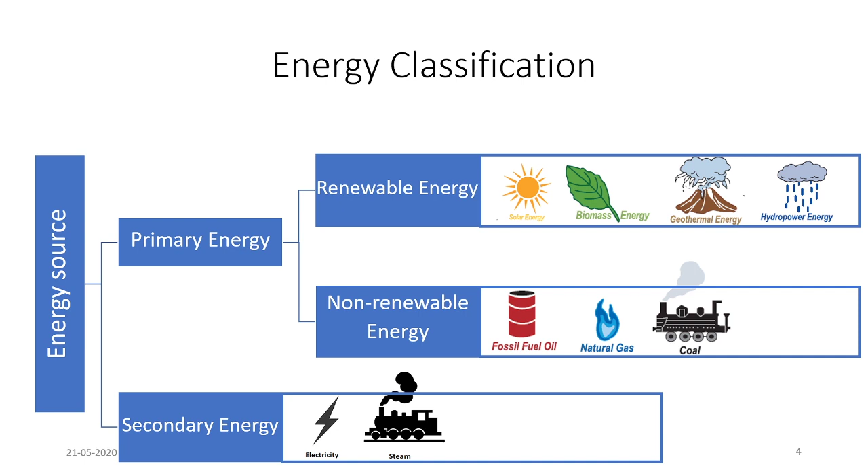Whereas on the other hand, non-renewable energy is the energy obtained from natural sources which cannot be replenished, or in other words, it cannot sustain against our consumption rate. Example: crude oil, natural gas, coal, etc. Primary energy can be used directly, or it can be converted into a more convenient energy form, that is steam or electricity, which is called secondary energy. Now there are two major classifications of energy, one of which we have just seen, that is renewable and non-renewable. Here we have classified energy based on available source.

The other way of classifying energy is conventional and non-conventional energy. Conventional energy is a well-developed source of energy and common over long years of usage. Non-conventional energy is a comparatively newer source of energy which is still under research and development stage. Let us classify energy sources in the given quadrant.

The first quadrant represents conventional and renewable energy sources, that is energy sources that are used over long years, well developed, and renewable, that can be replenished. In the second quadrant we'll see renewable and non-conventional energy sources, that is energy sources that can be replenished and are still under R&D. In the third quadrant we'll see non-conventional and non-renewable, and in the fourth quadrant we will see non-renewable and conventional energy sources. Now let us place each energy source in the quadrant.

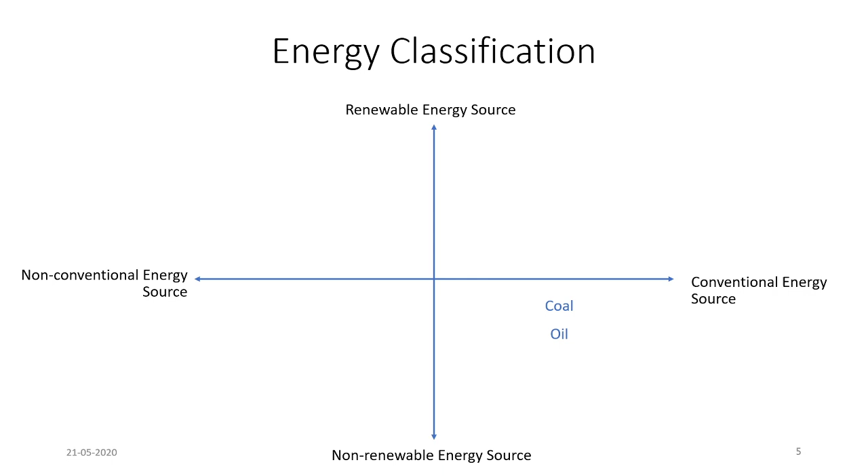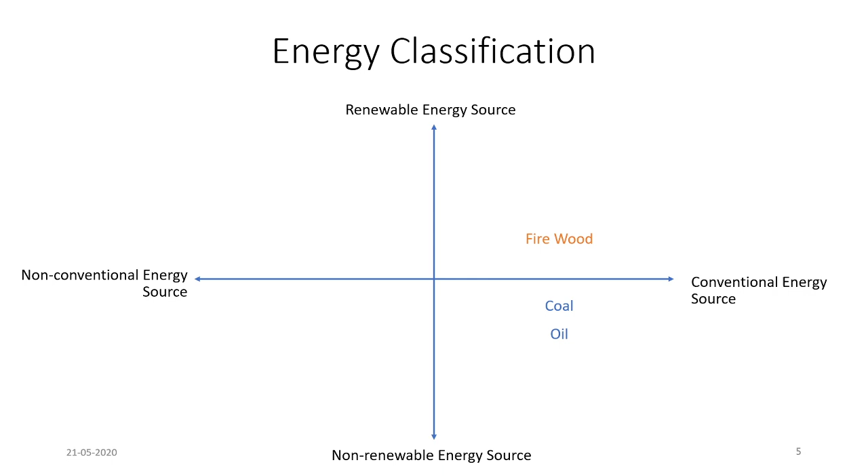Coal is a conventional source of energy. It is a well developed source of energy, but it cannot be replenished, so it is a non-renewable energy source. Same with crude oil: conventional but non-renewable. Next is firewood. Firewood is a conventional source of energy. We know we are using firewood for many years, but as long as forests are there, we'll consider it a renewable energy source. Cattle dung and vegetable waste will all fall under conventional but renewable energy sources.

Next is oil shale. Oil shale generally refers to any sedimentary rock that contains solid bituminous material that is released as petroleum-like liquid when the rock is heated in the chemical process of pyrolysis. So this is non-conventional, still under research, but a non-renewable energy source. Next is nuclear energy. Debate is still going on whether to consider nuclear energy renewable or non-renewable, but the amount of energy we get from a very small mass of radioactive material can allow us to consider it a renewable energy source.

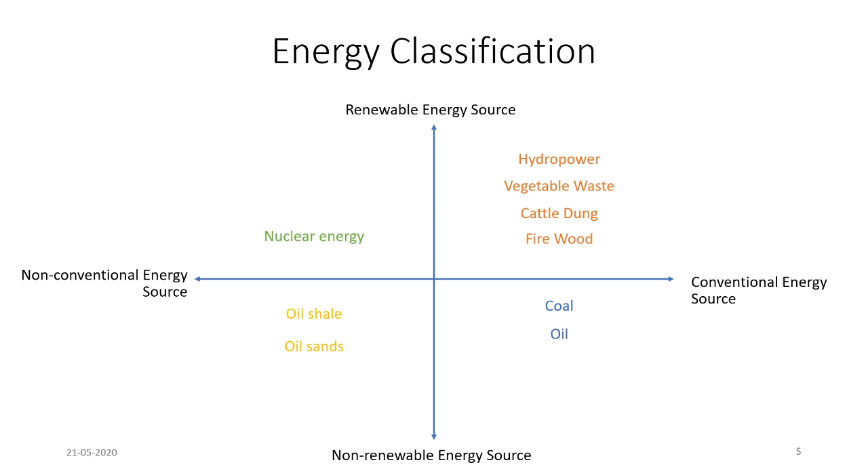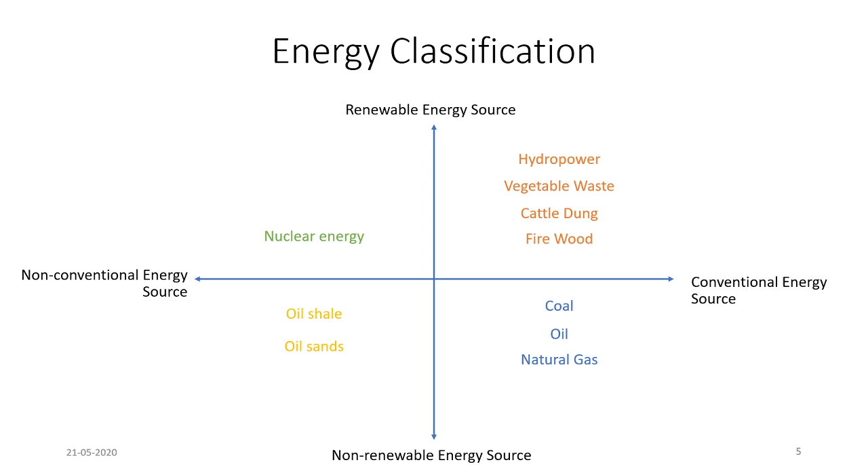Next is hydropower, again a renewable and conventional energy source. Oil sand is a combination of clay, sand, water and bitumen, a heavy black viscous oil from which refined oil can be extracted. And last is natural gas, which is again a non-renewable and conventional energy source. Once we know energy classification, now we can jump to the energy scenario.

First we will start with the international energy scenario, and the first resource we will consider is coal. Coal is the most abundant source of energy. It exists in the form of peat, lignite, bituminous, and anthracite. In the first table we can see countries with maximum coal reserves, whereas in the second table on the right hand side you can see countries with maximum coal production rate.

The largest coal resource is available in USA, that is almost 1/4 of total proven coal reserve, nearly 25%, followed by Russia, China, Australia and India. We will discuss this in more detail at national energy scenario. There is enough coal to last around 113 years at current R/P ratio, that is reserve to production ratio.

Now let us understand what is reserve to production ratio. We'll go with one example. If XYZ person has 100 rupees in his pocket and he is spending 10 rupees per day, then for how long will his 100 rupees last? So the answer is 100 rupees, that is reserve, divided by 10 rupees, that is extraction rate. 100 upon 10 will give you 10 days.

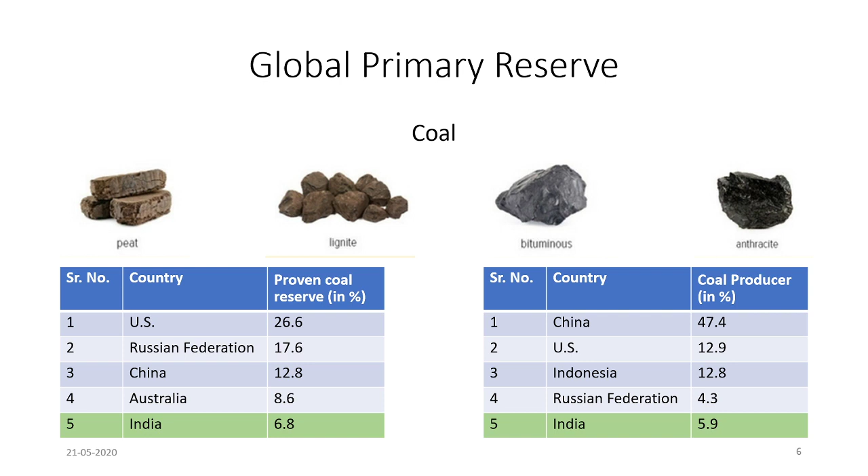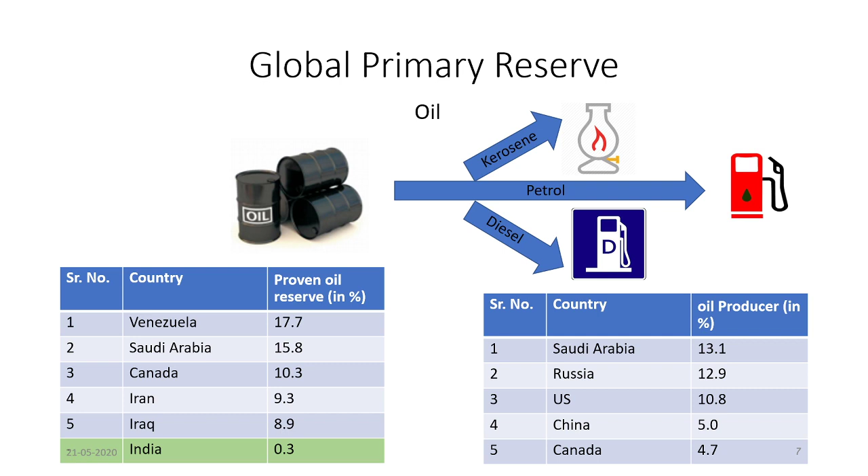Next is oil. Oil is a premier energy source with a wide range of applications. The global proven crude oil reserve was estimated to be 1,687.9 billion barrels. Almost 48% of proven oil reserves are in the Middle East. At the current rate of production and consumption of US, Russia and China, their oil fields will deplete within a decade. With the current rate of production and R/P ratio, oil is to last around just 47 years. Here we can see that Saudi Arabia is producing the maximum share of oil in the world, followed by Russia, US, China and Canada.

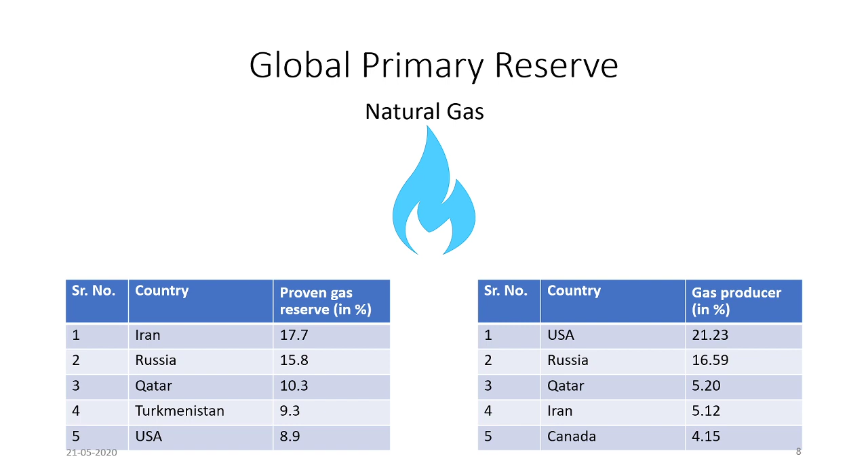Here we have talked about energy resources. Now let us see global energy consumption. Primary energy source is converted into secondary or tertiary energy. Final energy consumption is measured in million tons of oil equivalent, that is MTOE. The global energy consumption in 2014 was nearly 12,730.4 MTOE. In this, the share of oil was largest at 33%, followed by coal 30% and natural gas 24%.

It may be observed that India's absolute primary energy consumption is just 4.7%, because we are second rank for population and our absolute energy consumption is just 4.7%. That gives you the idea of the energy crisis in India. If we go sector wise, then industries are consuming 50%, followed by transportation 20%, residential 18% and commercial 12%.

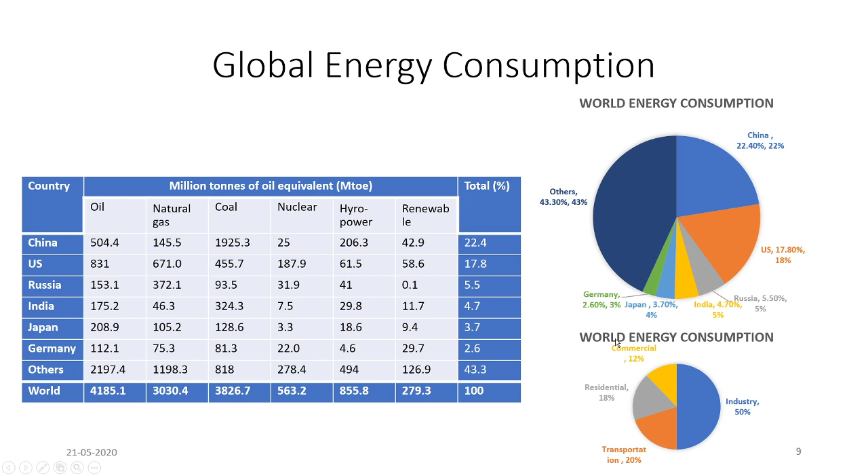Next we'll go for national energy scenario. We'll start with national energy reserve. First is coal. India has a huge coal reserve of about 60.6 billion tons, out of which 56.1 billion tons is anthracite and bituminous and 4.5 billion tons sub-bituminous and lignite. At the current reserve to production ratio, it may last for more than 100 years. The majority of coal, almost 80%, is mined with open cast mining or surface mining. The remaining 20% of coal is mined from underground mines.

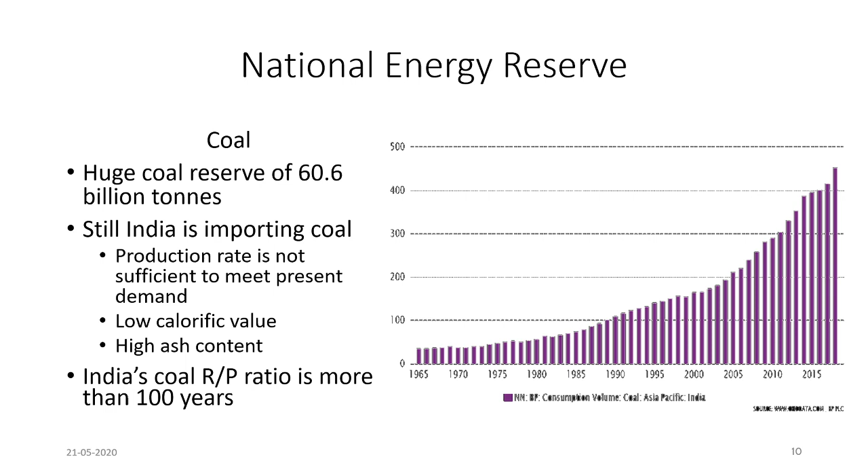India has a huge coal reserve, still we have to import coal from other countries due to the following reasons. The first reason is our coal production rate is not sufficient to meet our demand. Second is the coal available in our country is of low average calorific value with high ash content. Apart from this, one major issue to import coal is some political issues and some other issues as well. As discussed earlier, the current rate of production is not sufficient enough to meet the present demand of the country. Hence, we have to import coal from other countries like Australia, Indonesia, South Africa, which requires a sea route, and hence it is very much time consuming.

Next we'll go for oil. India's estimated oil reserve is 800 million tons. India's crude oil production was about 42 million metric tons against consumption of 175.2 million metric tons. So we are consuming 175.2 million tons against production of 42 million tons. That shows that almost 75% of crude oil we are importing. At current reserve to production ratio, oil in India can last around just 17.5 years.

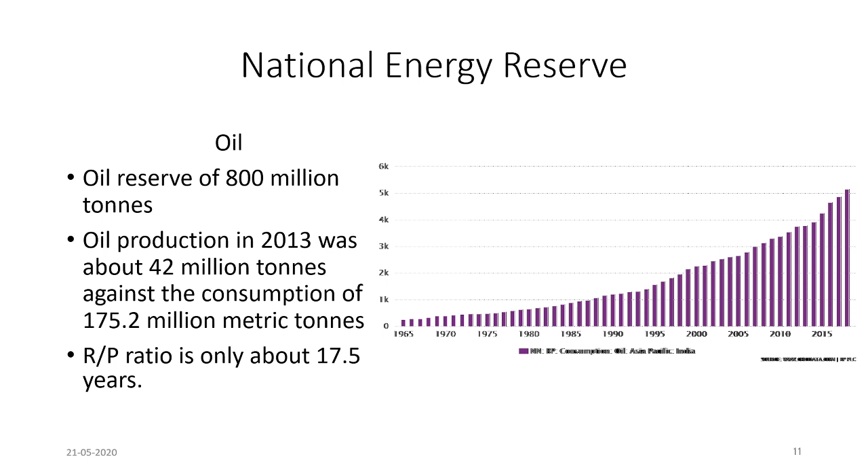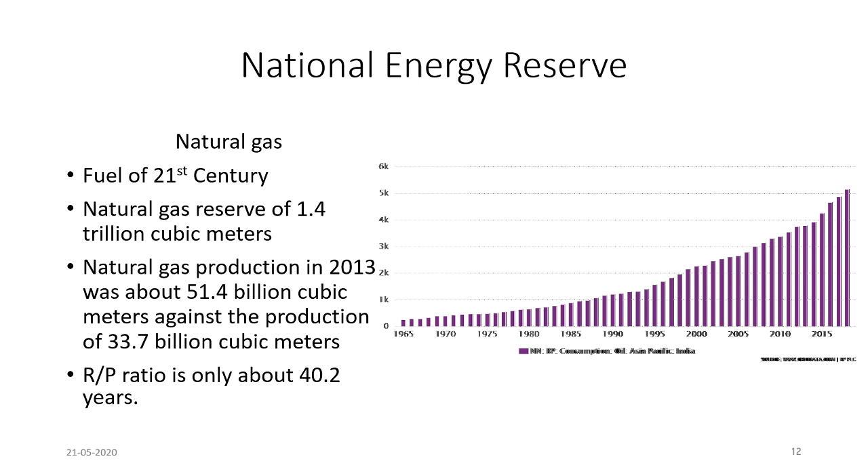Next is natural gas. Due to the less harmfulness to the environment, greater efficiency, and cost effectiveness, natural gas is considered a fuel of the 21st century. Apart from this, natural gas has the advantage of its high compressibility at lower temperature. India's gas reserve is estimated as 1.4 trillion cubic meters against the consumption of 51.4 billion cubic meters. We are producing 33.7 billion cubic meters; the remaining we are importing. India's gas reserves are estimated to last just for 40.2 years at the current reserve to production ratio.

So finally we are converting this primary source of energy into the secondary source of energy, and the most convenient source of energy is electrical energy supply. So what electrical energy supply is available in India? Out of that, you can see that 58.94% share is from coal, then 16.84% from hydropower, that is very big hydropower, then renewable energy 12.34, followed by gas, nuclear and oil.

If we find these renewable energy sources and distribute this 12.34 among large hydro, small hydro, solar and wind, then you will find that large hydro is almost 53%. Now large hydro has some disadvantages, and because of that we can reduce large hydro by increasing the shares of wind and solar. Wind is a more unpredictable source of energy than solar. Then we can focus on solar, and improvement can be done to increase efficiency of solar thermal or photovoltaics, so that the share of solar can increase from 17 to some large value, and ultimately that results in an increase in the renewable energy source share as well.

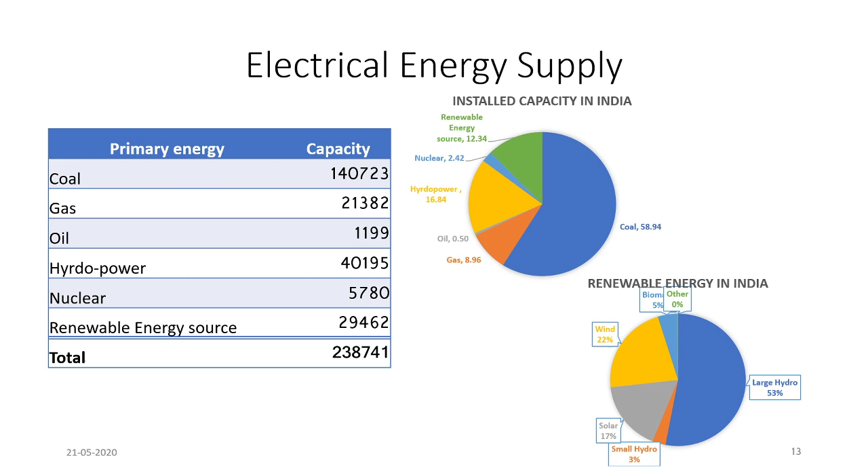This is energy consumption in India. Industry is consuming 44%, followed by transport 17%, residential 14%, and then finally agriculture just 7%.

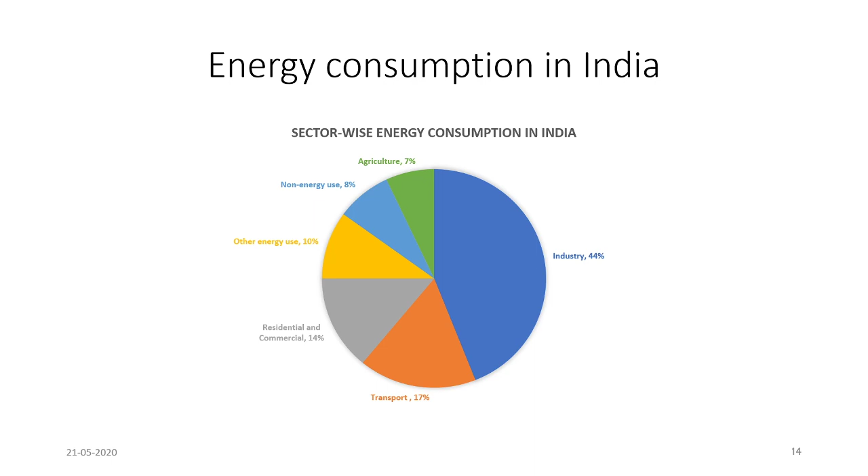So let's see what is energy management. Energy management is the strategy of adjusting and optimizing energy using systems and procedures so as to reduce energy requirements per unit of output while holding constant or reducing total cost of producing the output from these systems. So here we can see energy management is a strategic approach where we can adjust and optimize energy supply with the aim to reduce energy input, thereby reducing cost of energy. Energy management can also be broadly defined as a proactive, organized and systematic management of energy used in a building or organization to satisfy both environmental and economic requirements.

The objectives of energy management: first is to achieve and maintain optimum energy consumption and utilization throughout the organization. When we go for optimum energy consumption, definitely there will be maximum utilization of energy throughout the plant or organization. Second, to minimize energy cost without affecting production and quality. By minimizing energy consumption, cost of energy can also be reduced. And third, to minimize the environmental effect. This we can achieve in two different ways: first is utilization of renewable energy, and second, utilization of energy with maximum possible efficiency, which reduces environmental effect.

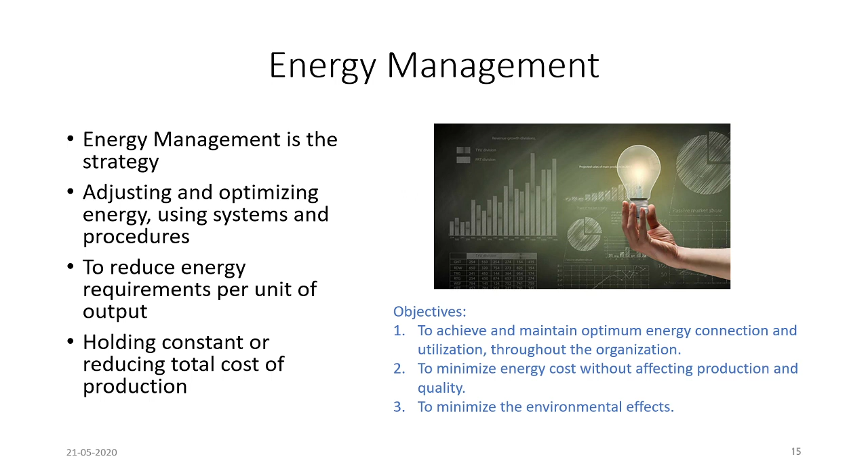Next, we will go for energy audit. As per the Indian Energy Conservation Act 2001, energy audit means the verification, monitoring, and analysis of use of energy, including submission of a technical report containing recommendations for improving energy efficiency with cost benefit analysis and an action plan to reduce energy consumption. In energy audit, we must first monitor, verify, and then analyze consumption of energy. Moreover, we have to find energy saving opportunities and give recommendations to improve energy efficiency along with cost benefit analysis. Finally, all these things are put on paper and a report is made which is to be submitted to the organization.

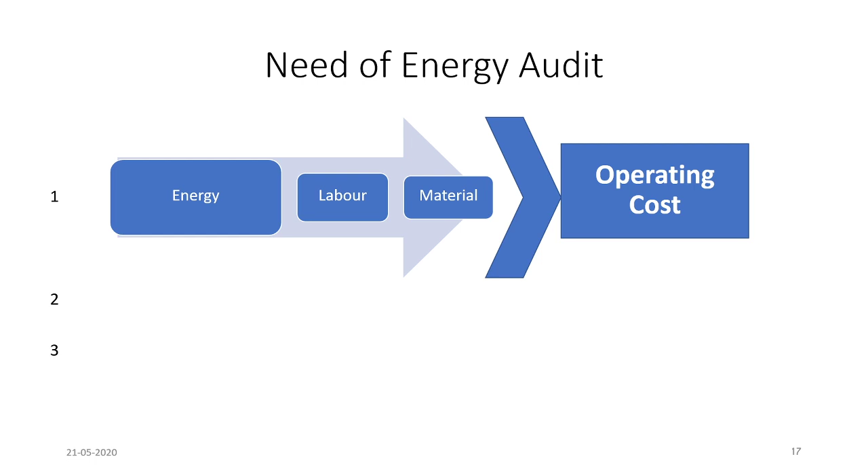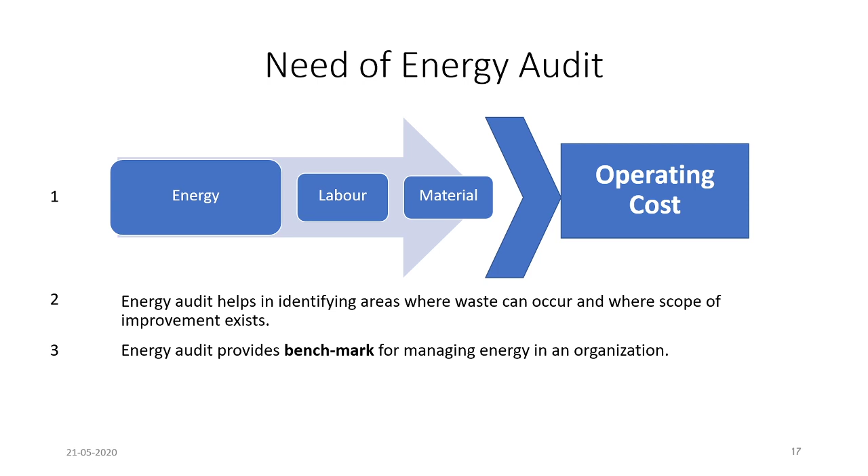Why do we need energy audit? In any industry, major operating costs are energy, labor, and material, out of which energy has the highest potential for cost optimization. In industry, we carry out many processes which require energy, and it may be equipped with various facilities which again require energy. So energy audit helps in understanding consumption of energy in various facilities and processes carried out in an industry so that one can identify the scope of improvement in terms of energy savings. Energy audit provides a benchmark for managing energy in an organization.

So basically, energy audit is a translation of conservation ideas into realities by providing technically feasible solutions with economic consideration. It helps to find out power consumption according to different areas and at various times. Types of energy audit: energy audit can be classified as detailed audit, preliminary audit, and targeted audit.

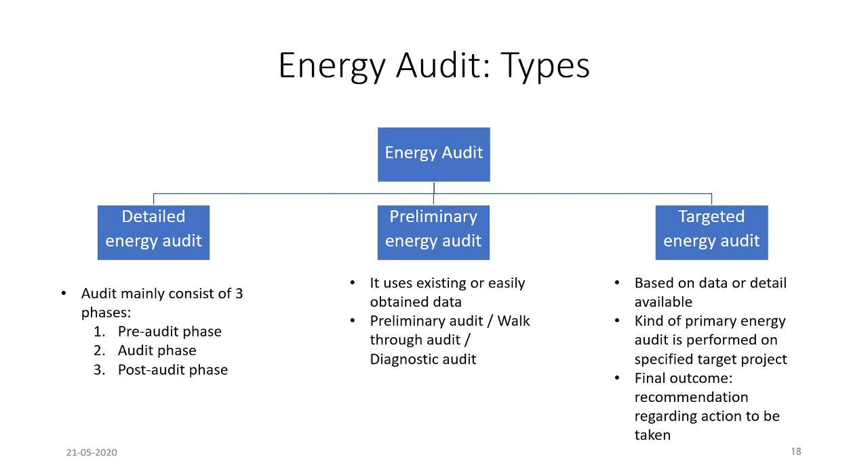Let us start with preliminary energy audit. Preliminary energy audit is a quick exercise. It is also known as walkthrough audit or diagnostic audit. It actually uses existing or easily available data. Preliminary energy audit can be completed in 2 to 3 or sometimes 4 days. Here, the energy auditor relies on his experience, visual information, and quick diagnosis.

In preliminary energy audit, the following steps are carried out. Step number 1 is to obtain primary data. This can include obtaining the electricity bill of minimum last 1 year. Then obtain production or plant related data. It includes data like for how many hours per day a particular machine is operated.

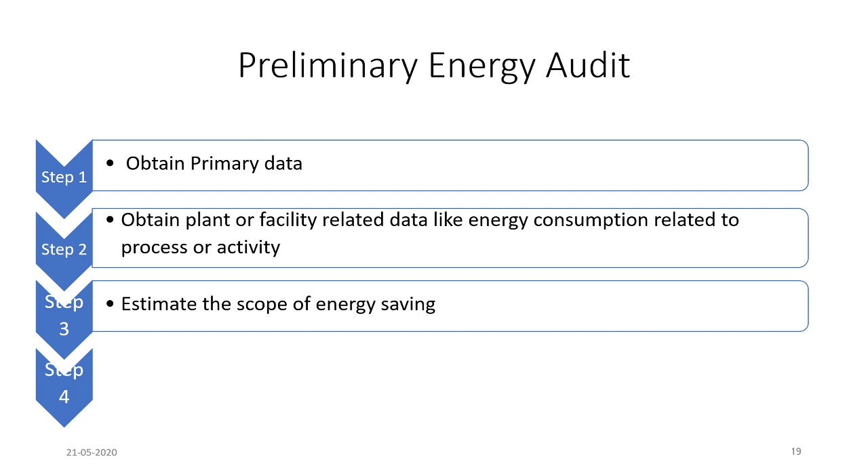Third is estimate the scope of energy saving. From this available data, the energy auditor has to estimate the scope of energy saving. From the various scopes, he has to identify the most likely and easier energy conservation opportunities. For example, unnecessary lighting, leakage, temperature setting, etc.

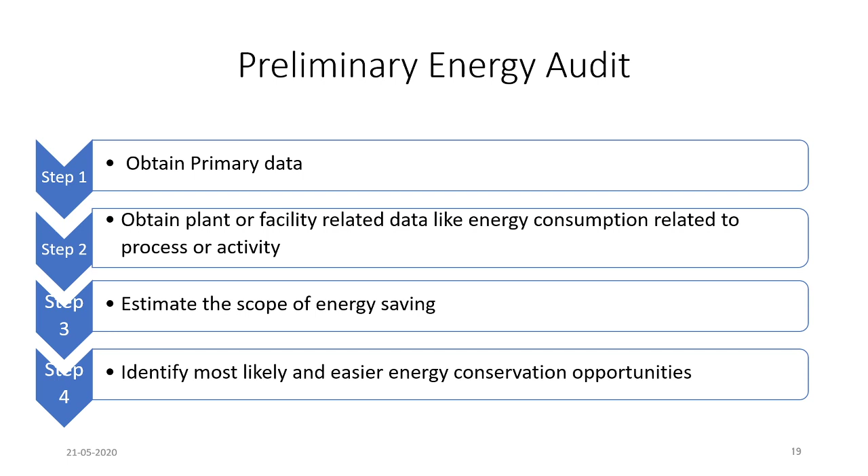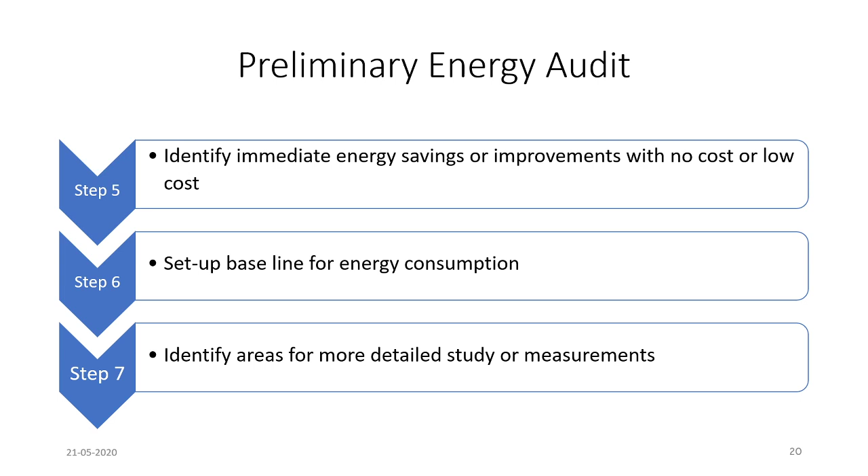Step number 5 is to identify immediate energy saving improvements with no cost or low cost, that is, prioritize various energy saving ideas. In step number 6, set up a baseline for energy consumption and then identify areas for more detailed study or measurement.

Let us see various leakages. So first, heat can enter through roof and wall. This loss can be reduced by providing cavity wall and wall insulation. Next can be glass walls. If heat is entering through the glass wall, which is a transparent medium for incoming radiation, it produces a greenhouse effect. Solar film can be provided to reduce these losses. And the next is floor loss. By providing proper insulation, we can reduce floor loss.

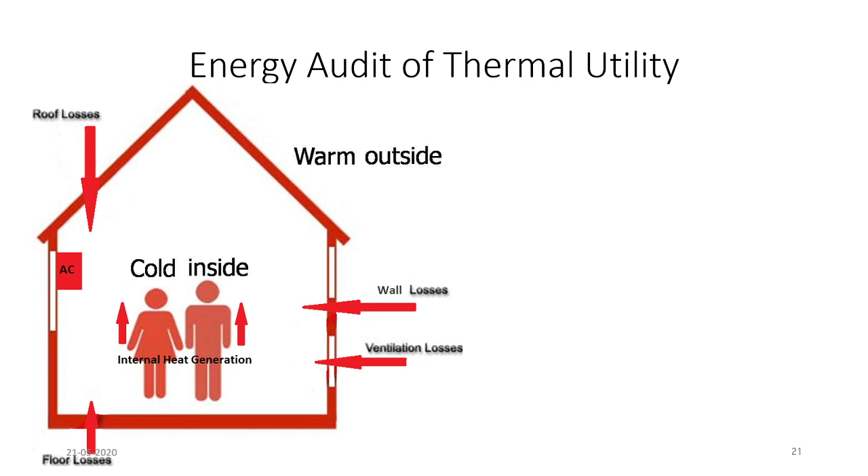This is one way. Now suppose the organization is going for a new air conditioning system, then it will have two options available: a 3-star air conditioning system with lower initial cost but higher operating cost, and a 5-star air conditioning system with higher initial cost but lower operating cost. As per BEE guidelines, if EER, that is energy efficiency ratio, lies in the range of 2.9 to 3.09, then that AC is labeled as a 3-star AC. If it is 3.3 or higher, then it is labeled as a 5-star AC.

Now EER, that is energy efficiency ratio, gives you insight into cooling capacity per unit power consumption. For calculation, I have considered the minimum EER for the given range, so for 3-star 2.9 and for 5-star 3.3. Some data is assumed here, that is a 1.5 ton AC that I have converted into watts. With the formula of EER, input watts are calculated, and then by assuming some hours per day for which the air conditioning system is running and dividing by 1000 to convert into kilowatt hours per day, we get the units of energy consumed per day. Then multiplying that number by 30 gives the value for 1 month, and multiplying it by the cost you pay per unit will give you the cost for the 3-star AC and 5-star AC.

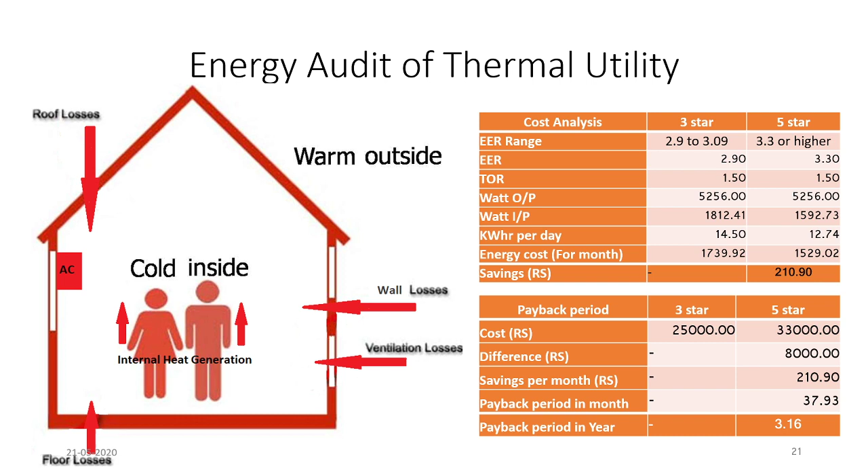This 8,000 rupees which I have paid extra initially is giving me a saving of 210.9 rupees per month. If I divide these two terms, then I'll get the payback period in months, that is 37.93 months, which if I convert into years, is almost 3 years. So the extra 8,000 I have paid, I'll get back in nearly 3 years, and after that I'll start making profit from that investment.

Next, I'll go for detailed energy audit. As the name suggests, it is a comprehensive audit which is detailed energy project implementation plan for an activity. It includes detailed energy cost saving calculation. Key principle for detailed energy audit is energy balance. Detailed energy audit is carried out in three phases: pre-audit phase, audit phase, and post-audit phase. It actually requires around 1 month to complete detailed energy audit.

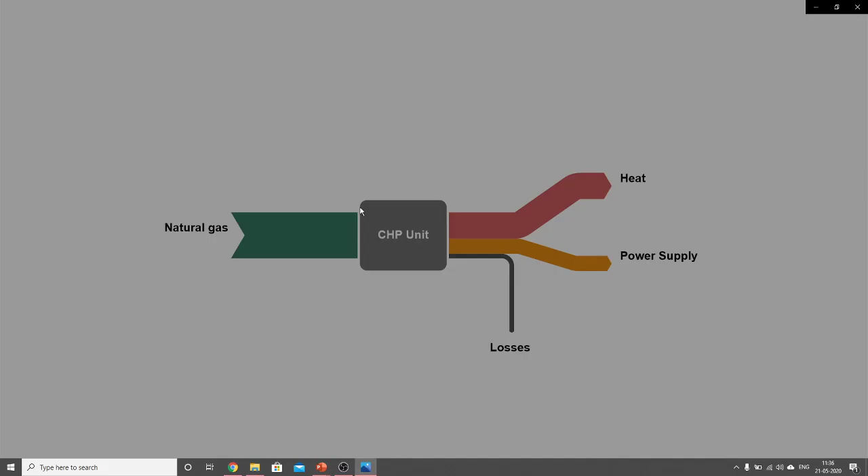In next step, energy utility diagram or energy flow diagram or process flow diagram can be drawn. Under this step, plant service utility diagram can be prepared. Here you can see a typical example of energy flow diagram. It is used to show energy flow and energy transformation graphically and quantity wise. Here we can see that input to the combined heat and power unit is natural gas, which is then converted into heat and power at the cost of some losses. Here thickness of each flow gives you the amount of energy associated with it.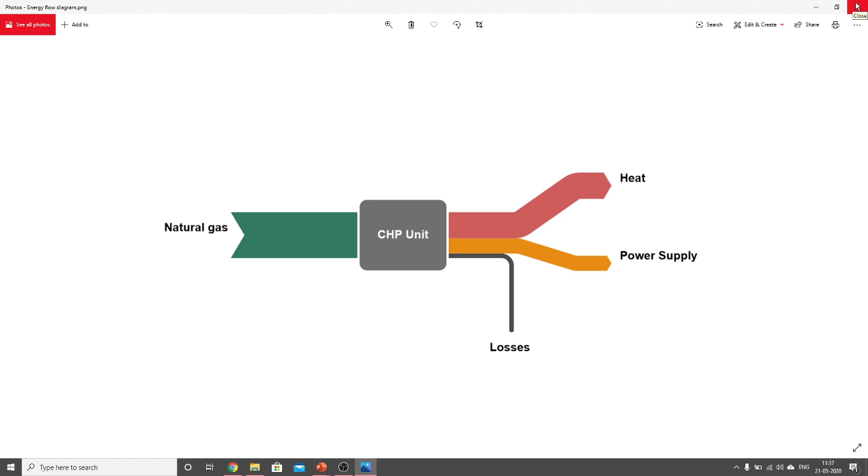This step also includes preparation of process flow chart for energy audit activity. So it gives idea about transformation of energy, material, etc. in the plant. Step number 4 is to conduct survey and monitor. It mainly includes measurement. In this step, with the help of portable measuring instruments, measurement is done, data is taken, and operating data can be obtained.

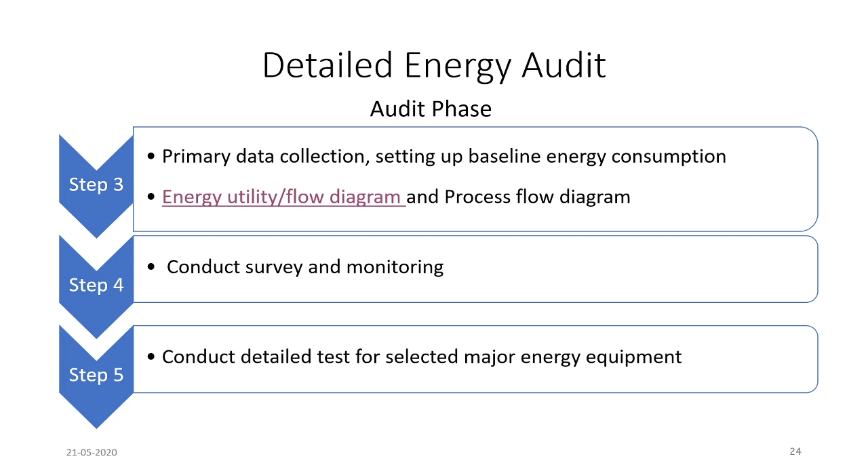Once we get data, next step is to go for detailed test for selected major energy equipments. Under this step, energy guzzling devices like boiler, pump, compressor, furnace, etc. are monitored for 24 hours. Once we get data, we have to analyze it. So analysis of energy use. In this step, by applying energy balance and mass balance, energy loss or waste analysis can be done.

Next step is identification and development of energy conservation opportunity. In this step, ideas are developed for energy saving opportunity. Ideas are reviewed and a lot of brainstorming is done to finalize efficient technology or component needed for that energy conservation opportunity. Sometimes even contact can be made to vendor for new and efficient technology for its pricing and costing. Once we get cost, we can go for a cost benefit analysis. In cost benefit analysis, technical feasibility and economic viability is checked for each energy conservation opportunity, and based on that various options are prioritized.

The most promising project from this can be selected, and let's see based on what we can select the most promising project. It is based on two parameters, economic feasibility and technical feasibility. A project is considered a good project if its economic feasibility is well defined and attractive as well, and if the technology is already available in the market, it's existing technology, then it's easy to adopt it, and its technical feasibility is also good. Such types of projects are considered good. So based on these guidelines, we can select the project which is most promising.

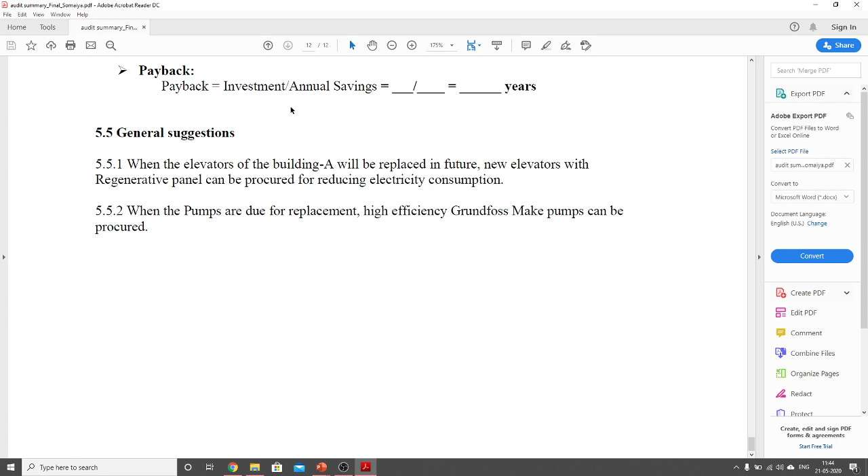At the end we have to give general suggestions for the future. Here one suggestion is given that current elevators can be replaced by regenerative panels so that energy consumption will be lesser, and when pumps are due for replacement one can go for high efficiency pumps. Well, this is the energy audit report of a small commercial building, hence it is small, but it can be very big when you are doing an energy audit report for a power plant or a big commercial building; then definitely its size will be comparatively larger.

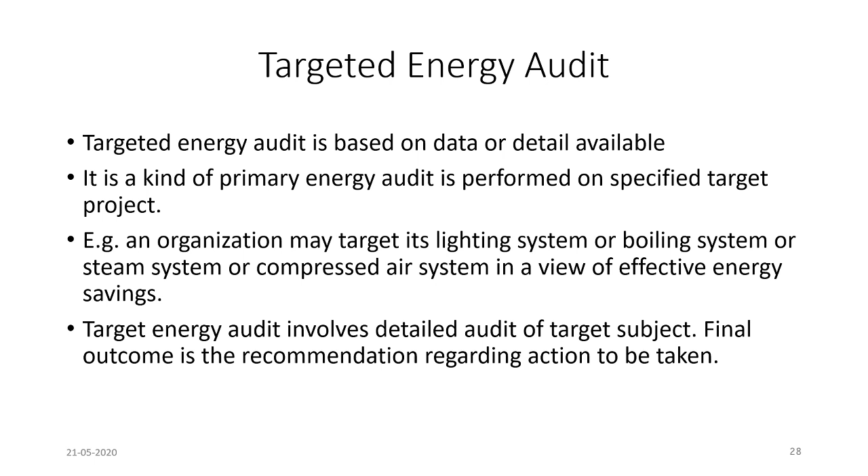Next, and at last, is targeted energy audit. Targeted energy audit is an energy audit conducted based on data or details available. A kind of primary energy audit is performed on a specific target project. For example, an organization may target its lighting system, boiler system, steam system or compressed air system with a view to effective energy saving. Targeted energy audit involves audit of the targeted subject only. The final outcome is the recommendation regarding action to be taken. So that is the third and last, targeted energy audit. Now we'll go to the advantages of energy audit.

Energy audit helps in reducing energy cost in the facility or plant for the same production. Reduction in energy cost helps in reducing production cost in a plant or facility. Reduction in production cost improves competitiveness of product in market. Reduction in energy cost results in lower electricity bills.

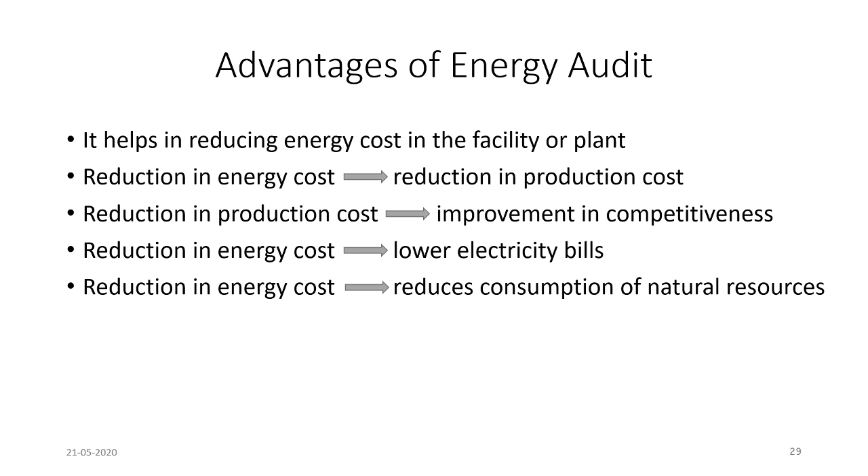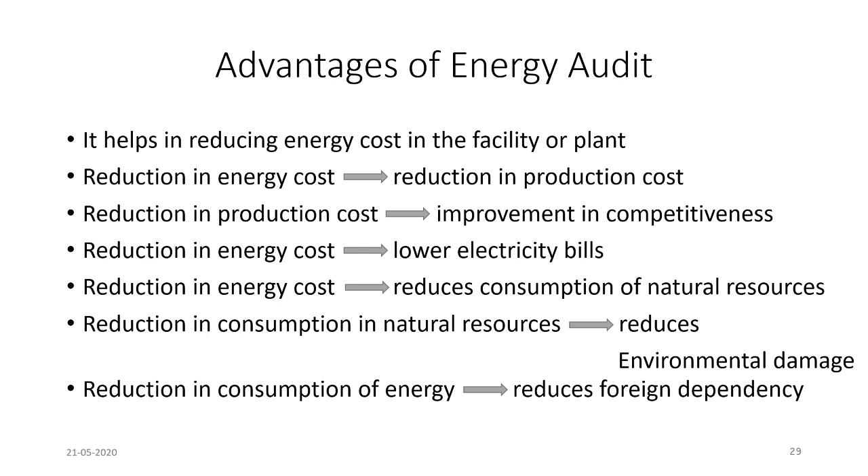Reduction in energy cost reduces consumption of natural resources. Reduction in consumption of natural resources, again, helps in reducing damage to the environment. And finally, reduction in consumption of energy reduces dependency on other nations for natural resources.

Let us understand importance of energy audit. Energy audit, even though it seems to be a very complex activity, is actually a very simple method that uses the basic principles of energy conservation and mass conservation. With a simple fundamental principle, one can have huge impact on performance of any plant or facility, and hence output of any plant and facility.

Suppose an energy auditor somehow manages to improve 0.1% efficiency. For any power plant it's a big number. For a power plant having capacity of 500 megawatt, it results in improvement of 0.5 megawatt, that is nothing but 500 kilowatt. So just by improving efficiency by 0.1%, one can get 500 kilowatt more power. That's a huge number. This shows the beauty of a process where application of simple fundamental principles results in huge improvement.

After knowing all this, one must be thinking about considering energy auditor or energy manager as a career. So here are some guidelines for you. Prerequisite to become energy manager or auditor is a graduate engineering or equivalent degree with 3 years of experience. For MTech or ME, it's 2 years of experience. If you don't have 3 years or 2 years of experience in energy sector, you can still apply for the exam, and once you complete the experience and submit the relevant documents, you can get the certificate of energy auditor.